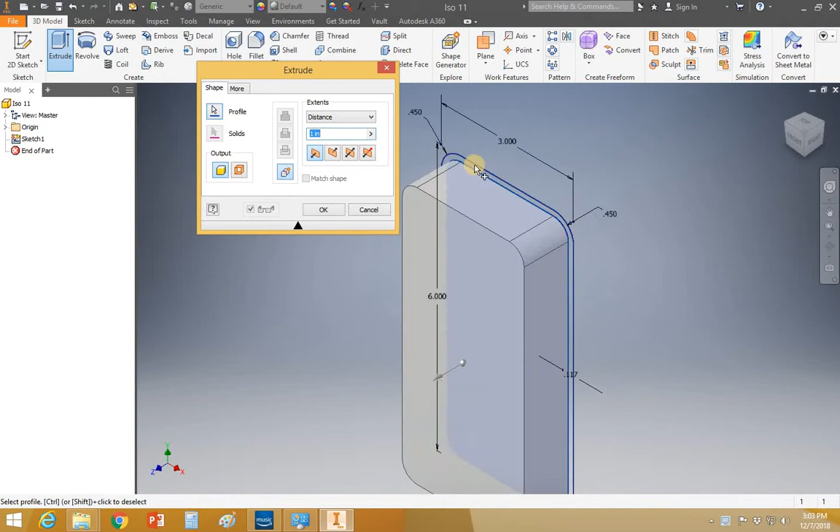If you go about trying to extrude this, right? If I go to extrude and I select the two objects, so if I select there and I select the outside also, it turns it all into one big object. Because when you have your cell phone, you have your casing and then you have your glass kind of offset from that metal case. So we can't really represent that if we extrude this all in one plane.

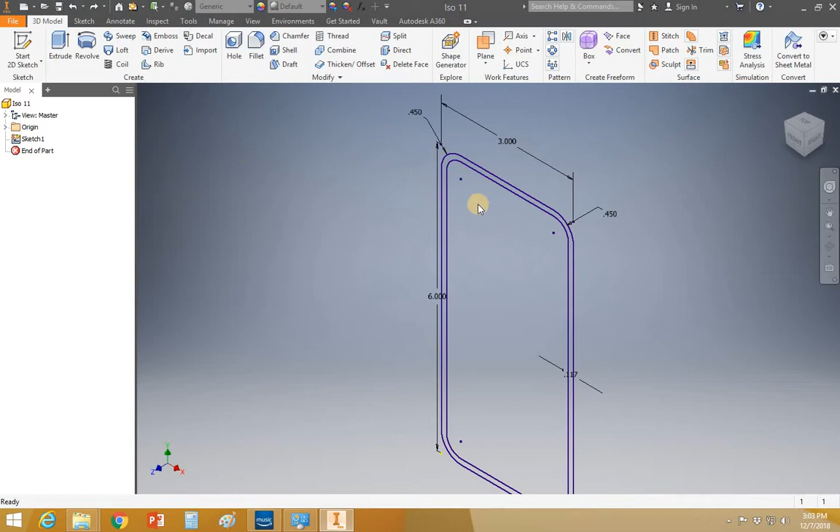And I want to be able to offset from there, so I want to do it all in the same sketch. So I'm going to hit Control-Z to undo it. What I would suggest in this instance, and you have to look at every sketch and every drawing differently, is how you're going to go about it. So I would select the outside edge, make it 0.25. Say OK. Then I would put another sketch plane down on top of it.

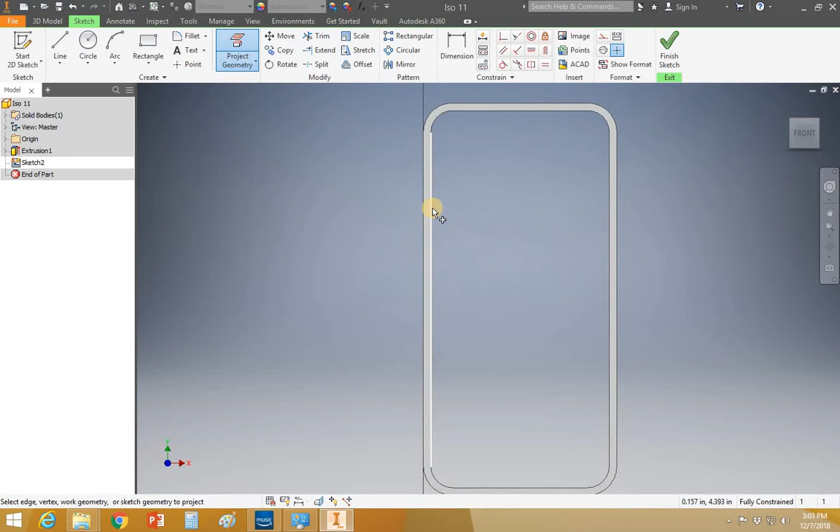And I would do what's called project geometry. So right now, this is like a big piece of glass that has no writing on it. You want to add the writing so that you can extrude the object from it. So if you go to project geometry, you'll see it'll turn these black lines from black to yellow. And what that yellow is representing is it's telling you that that black line has now come forward and that it is an active sketch line that you can extrude.

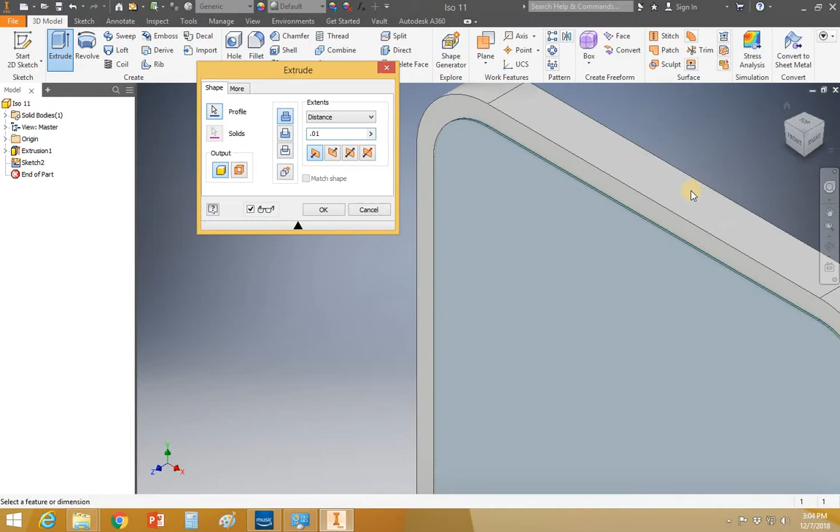So once you have one full enclosed loop, once again, you can hit Finish 2D Sketch, and we can go to an extrusion. Now, I can select my object here, and I'm just going to come off of it like, I don't know, 0.01, something like that. Just enough where, imagine in real life being able to rub your thumb over it and feel that raised piece of glass. All right, so you've got that, but the problem now is that if you look at the back of it, it's hollow.

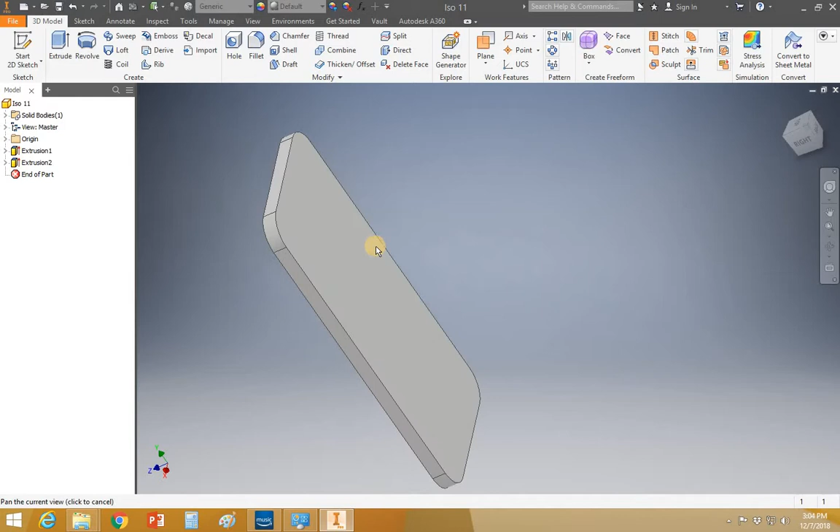And we don't want to have to go through this whole process again, so what I would suggest doing is hit the two different distances. And so if you make the first distance 0.01 and then the second distance the same as the front, it'll fill that whole thing in, and now we'll have a big flat back like we wanted, and we'll have a front where we have that raised lip.

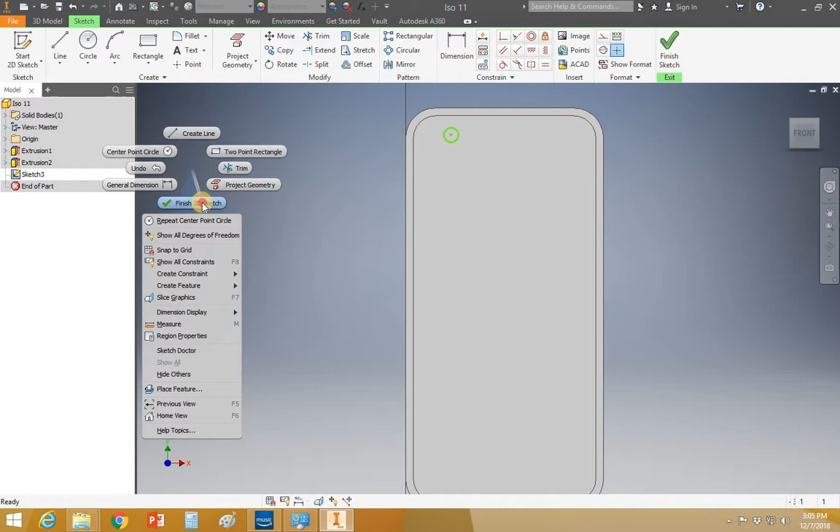I'm also going to go and throw in my camera. I'm not going to measure it. I'm not going to worry too much about exactly where it is, but I am going to draw it in. So I'm going to put a 2D sketch on here, and I'll grab a circle, and I'll draw it right there. Okay. Again, you would make it the right size, but just to get something on paper or on computer or whatever you want to look at it. So finish 2D sketch, and we'll extrude it.

And now what I would do with this one is I would cut this one into it. So choose cut, and I'm going to choose a distance that's not 0.01. I don't want to choose that exact same distance because it's going to bring the back of it to the front of the phone, and you want to go a little bit deeper. Even if you just go 0.015, something so it's a hair different, it'll help you out a lot.

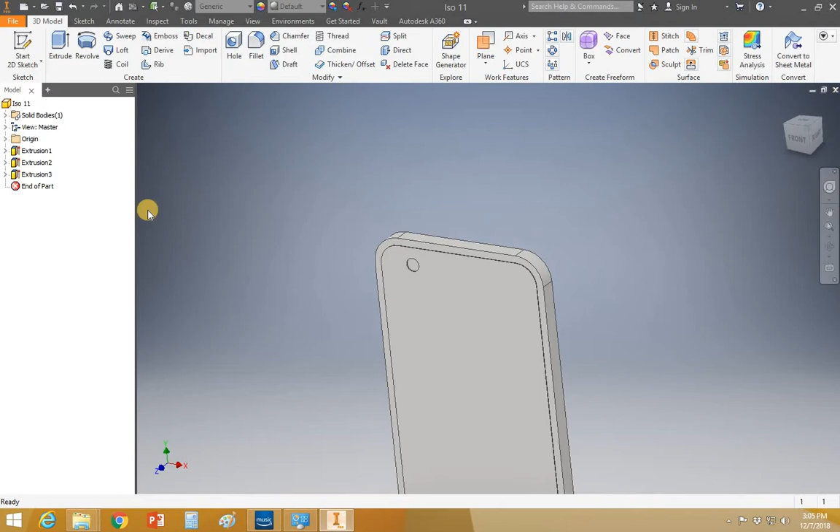So now that I have my object, something else that you'll find helpful is that I can change the color of the extrusions, right? So let's just say I wanted to change the color of the case. Right-click on the extrusion, go to Properties. And we'll make it something obvious so you can tell that we did something to it. I don't know, not clear, dark red, okay? Say OK, so we have a dark red case.

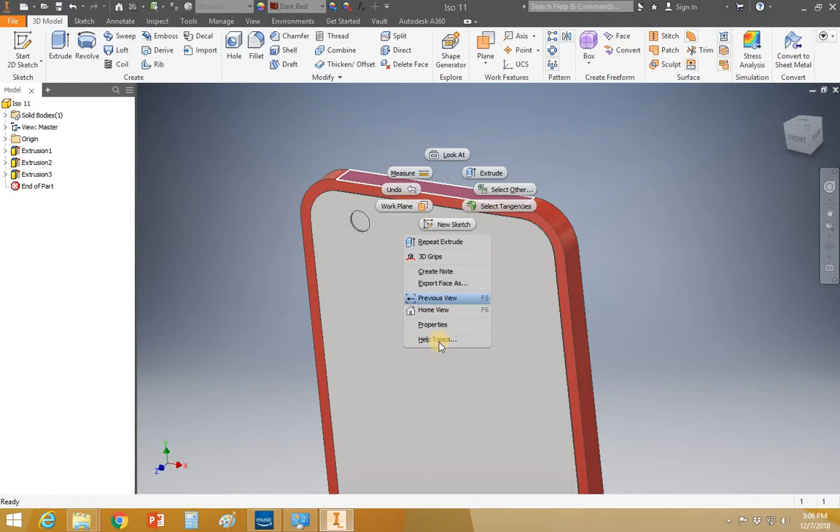If I just wanted to change a face at a time, I can click on the face and go to Properties and just change each piece. So, I don't know, make this beige, I guess, doesn't matter. But you'll be able to tell, so that's that. If I want to change this, again, I would choose the entire extrusion, go to Properties, make it cyan, whatever that is. I guess a blue of some kind, right? So then you do the same thing with the camera.

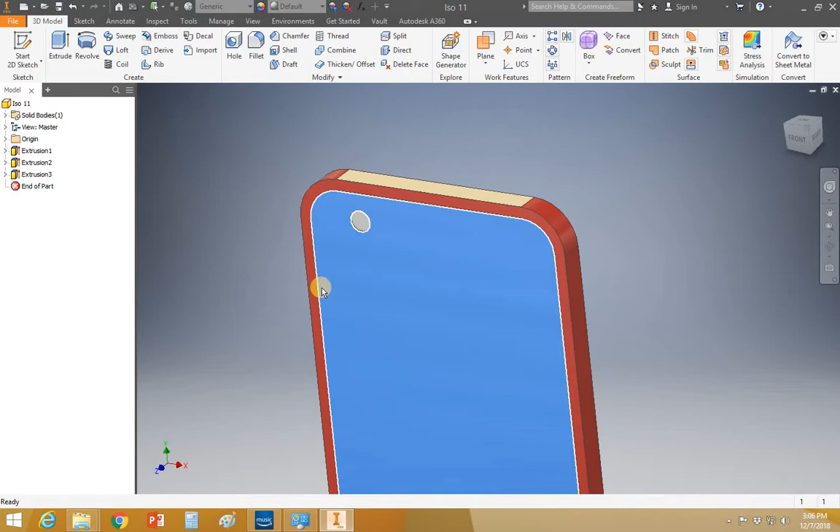So point being that you can go through and change piece by piece or face by face. The better move is to change the entire object when you can. It'll show up better. It'll work better with other pieces. But if you've got a unique situation where you need to change one specific plane, you can do that. All right, so if you're good with that, you should be all set.